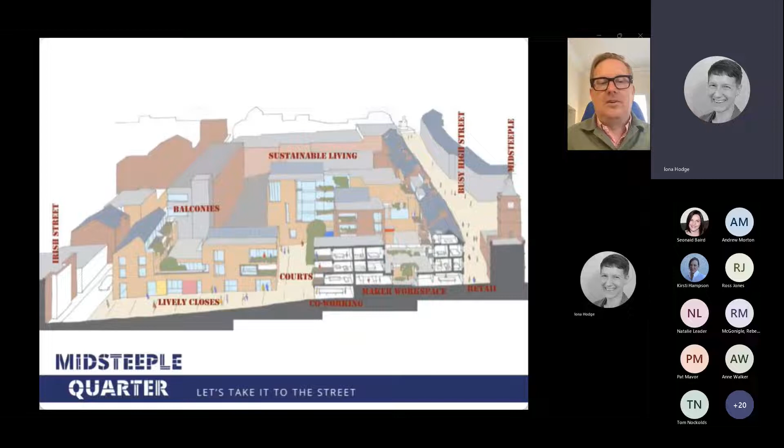To summarise it, the Midsteeple Quarter vision is to see the local community take control of a group of underused, neglected high street buildings, refurbish, redevelop these as a contemporary, living, working, socialising, learning and enterprising quarter, a new beating heart for a more diverse town centre and a catalyst for a thriving and resilient future Dumfries. In 2018, we held an architecture competition to provide ideas for the concept, which was won by ARPL Architects, with whom we now have an ongoing relationship, and they produced the design of phase 1 of our redevelopment. This master plan was submitted to the council and was approved in November 2019 as supplementary planning policy, underpinned by planning policy in the local development plan 2 for Dumfries and Galloway. In 2022, it won Master Plan of the Year at the Scottish Design Awards.

A total project cost of about 25 million is envisaged, and it's intended as a long-term project over the next 20 to 25 years. The master plan includes a phasing plan showing phase 1 currently under construction and fully funded. Phase 2, site assembly through purchase and meanwhile use of other high street frontages and backland. Phase 3, the development of those high street frontages and backland. And phases 4 and 5 are not necessarily considering acquisition, but working with the current owners of the properties. This phasing has been carefully factored into options and plans for how we provide low carbon heating for the site.

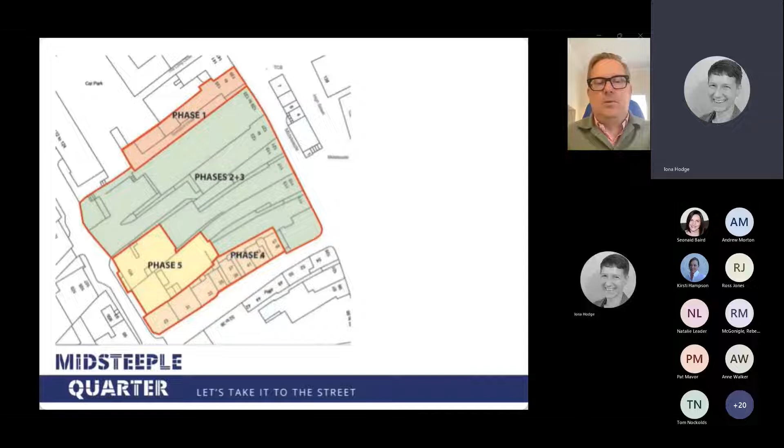Phase 1 of the project started construction in June this year with a programmed completion date in early 2024. We took ownership of this building through a community asset transfer in November 2018, and the redevelopment will provide a range of flexible business, cultural and community spaces on the ground and first floors and 7 affordable flats to rent on upper floors.

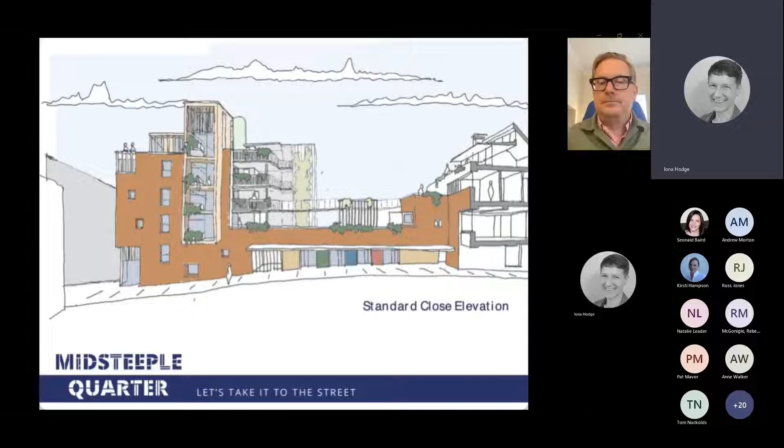The Midsteeple Quarter team, the Phase 1 design team and Local Energy Scotland sought to find ways of minimising the carbon footprint of the Phase 1 development during the design phase. And given that the proposed flats were to be for affordable rent and much of the commercial space would be rented to enterprise startups and community groups, we also wanted to keep bills down as much as possible.

This foresight has proven invaluable given the current energy crisis, as well as being motivated by net zero targets and climate crisis concerns. All of the usual renewable energy sources were considered during the design process, and solar PV will be put in the roofs.

Dumfries overlies the only significant Permian age basin in Scotland, the youngest and therefore least compacted sedimentary bedrock type in southern Scotland, and includes a warm water aquifer. Previous boreholes in the region and studies commissioned by the local authority indicated that this could have the potential for geothermal energy extraction. With funding from CARES, the development of a proposal has taken forward the aspiration to create a district heating system using geothermal technology related to this unique geological opportunity.

This has enabled us to engage the services of Locogen consultants to advise on the potential of this and manage the process of taking it forward. A feasibility study showed potential for substantial heat resource from the aquifer. Funding secured by CARES and the Energy Redress Fund is enabling us to take forward the drilling of 2 test boreholes in Dumfries High Street. This will shortly be going out to tender.

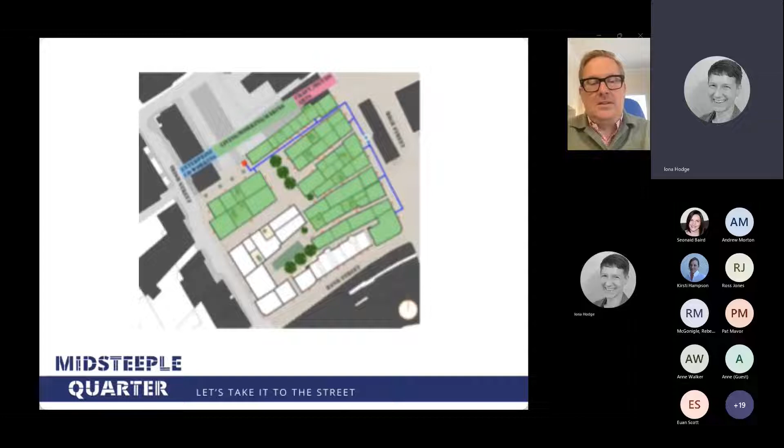Tests of yield from the boreholes will inform the design of the heating system for phase 1. If it confirms that such a system will work at this location, we plan to not only heat phase 1, but install the piping infrastructure in the High Street now, so that over time we can create a district heating system for the whole Midsteeple Quarter and potentially the wider town centre too. The benefits of this will enable us to supply affordable heating to our buildings and, depending on the yield, the wider town centre too.

Midsteeple Quarter has an ambitious vision for the High Street regeneration.

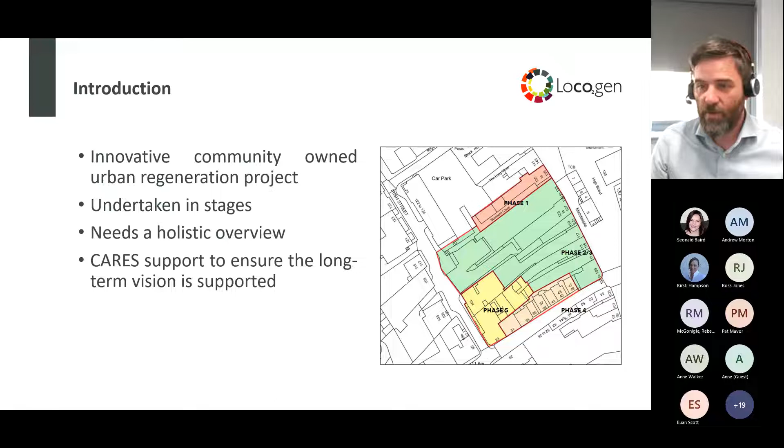And that's something that CARES were bought into and were able to then support Midsteeple Quarter in delivering. So our challenge was to try and understand how all that was going to fit together, which has been fun, complicated, but fun. So at the earliest stage, what we had was the architect's master plan drawing.

So we had to take that information and understand what that meant in terms of heating profiles, in terms of electricity profiles, in terms of what those demands were going to look like throughout the year and across the different building types, so that we could start to get a handle on what the renewable energy options were going to be. So we had to look at all generation types, but it became clear pretty quickly that PV and some form of heat pump were going to be the predominant options.

Given the inner city nature and the layout of the buildings, we're going to maximise the opportunity for PV on the roofs, but there's little more. It adds a proportion of the energy demands, but it is not as much as the full demand could be for the buildings. But it will supplement the building energy requirements.

The bulk of the work that we've been doing has been looking at the heat delivery portions of the project, with the intention that as these buildings get built, there'll be no gas, and we wanted to look at the zero carbon or low carbon heating options anyway. We knew that we were trying to compare predominantly the direct electric or air source heat pumps as the base case, as the business as usual.

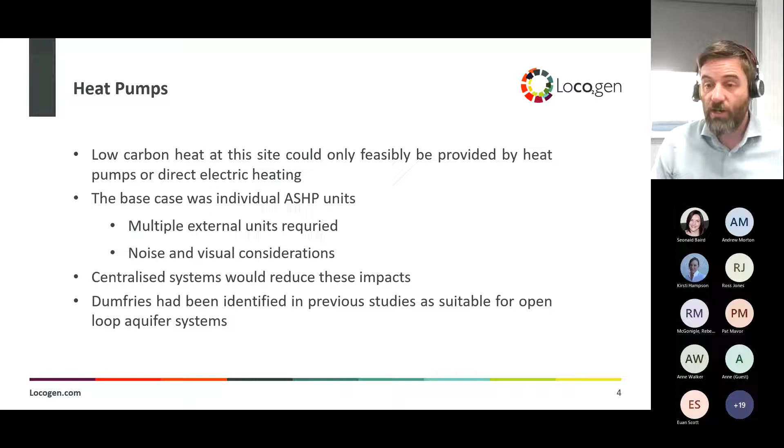So there are options for both centralized air source systems and for ground source systems. But as Scott mentioned, Dumfries has an interesting geology. It had been flagged in previous studies that there was the potential for what's called an open loop aquifer scheme, where we pull water out of the aquifer, put that through the heat pump to abstract the ambient low temperature heat, and re-inject water back into the same aquifer. So this is more efficient in some respects than the traditional ground source system, because you're getting that direct heat exchange with the groundwater itself. It has other issues, such as we have to have the right pumping equipment and the right filtration, but it provides quite a unique opportunity for us to explore in this situation.

So as you said, there are two topologies, two options that we looked at. One is where you can have an air source unit driving a low temperature network with individual heat pumps in each building. So the initial air source system would provide that base load heat, and then each individual flat would use its own heat pump to drive the temperature up to the demands that they require.

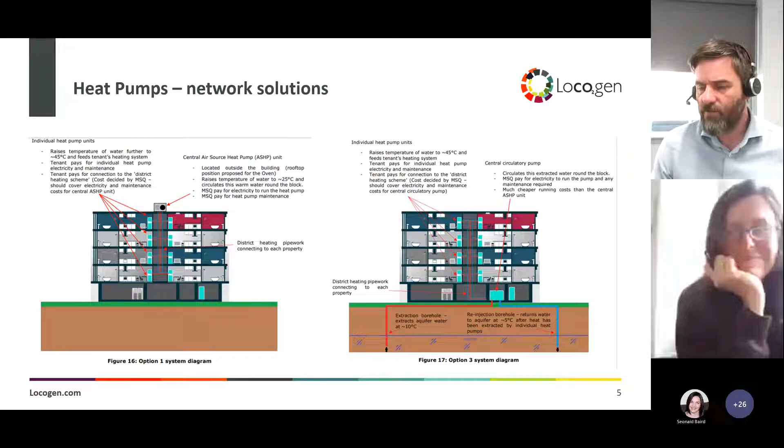This is a system that's been used in London and a few other places where they can't access groundwater or other low temperature heat sources, and that's been the alternative, the fallback technology for the site here. But what we really wanted to explore was the aquifer system, which is the one on the right, which is where we're pulling the water out.

Now, we don't know exactly what that temperature is going to be, but we anticipate it to be around 10 degrees, which is pretty good for ground source systems. And if, as is believed, the aquifer is mobile, then that will recharge.

So one of the issues that you see with ground source systems, where it's a closed loop network, where it's just pipes in boreholes with the water running through those boreholes, is that if it's not designed carefully, you can slowly extract more heat, and the temperature of those ground loops can cool slowly over time. Whereas with a mobile aquifer, water is passing through and refreshing the energy that's being pulled out. So you can maintain that same input-output temperature differential through the operation of the system.

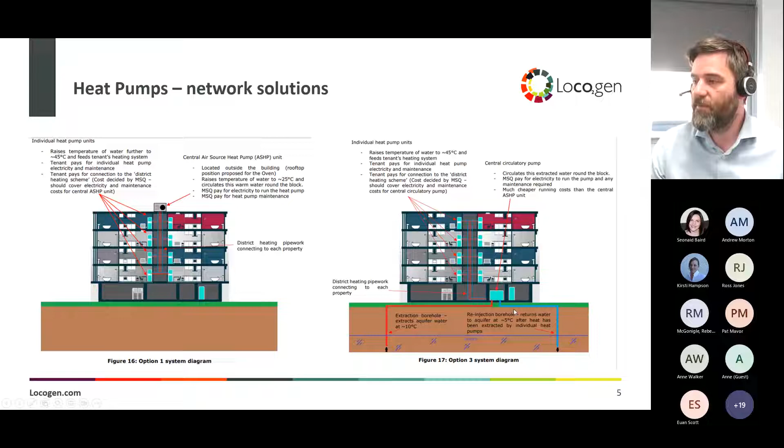So it's quite an exciting, quite an innovative and interesting scheme that's being looked at here. But it's complex. With closed loop systems, it's much easier to understand. We just need to know what the geology is going to be, and you can work out what the heat transfer coefficients are likely to be and the number of boreholes. For something like an open loop system, you really need some people that understand it. There are only a few organizations that have the kind of technical skill and have been involved in these types of projects that we can bring in to advise us on the technical details of that subsurface geology.

So we brought in a specialist consultant, Carbon Zero in this case, who did the hydrogeotechnical studies and designed how those borehole systems would work so that we could abstract the heat that we need. Because again, we're not looking at providing a system that's just going to feed the stage 1 building, but enough water pulled out of the aquifer that we can provide for all of the phases of the Midsteeple Quarter development. So it's a bigger, more complex system because we're making that forward planning.

So we're looking at drilling 2 holes. They're lined, cased holes. They're much larger than you would see for normal ground source closed loop systems. And they're fitted with a filter pack to stop the silt and the sand from being pulled through. And we abstract from one, suck it up, and then re-inject it back into the other. But as with everything to do with geology, all the desktop investigations in the world and the analysis of other boreholes in the area, all that got studied, but you only truly know what happens in your area when you drill the hole.

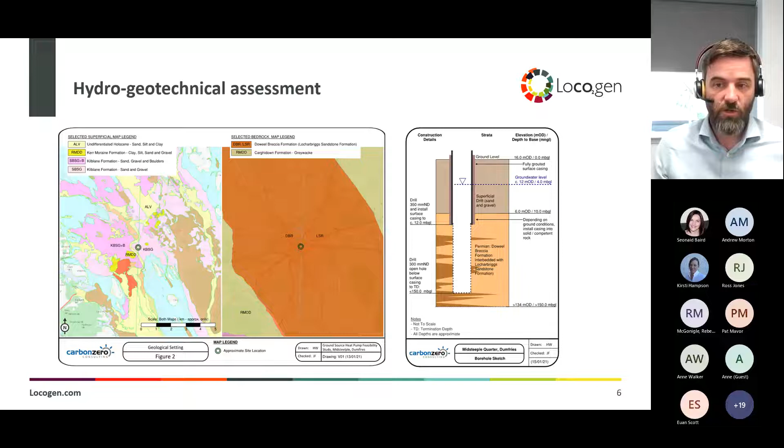So we worked with CARES and Energy Redress to get the funding so that we could drill those 2 holes. And those 2 boreholes that we're going to drill as test boreholes, they will become, fingers crossed, the live boreholes themselves. So it's not that you drill a test and then abandon it and do something later. The hole you drill is the hole that you test, and then the hole that you will use going forward for that network.

So we wanted to understand the scheme, not just in the isolation of the Midsteeple Quarter development, but in terms of any other future developments, because with LHEES and other Scottish Government considerations around renewable heat, we want to make sure that this is part of the future development strategy. So we were speaking to the local authority. We've been speaking to other developers in the area to understand what their loads are going to be. And they were all very excited and all very interested.

And I think it's fair to say that they really want to know how we get on, because they're really keen to do something similar, and they hope that our project turns out well. So it's very clear that if this works, then we expect there to be replication of it going forward in the area. But they were all very keen that we champion the way and lead the cause to identify and answer the questions that everybody wanted answers to.

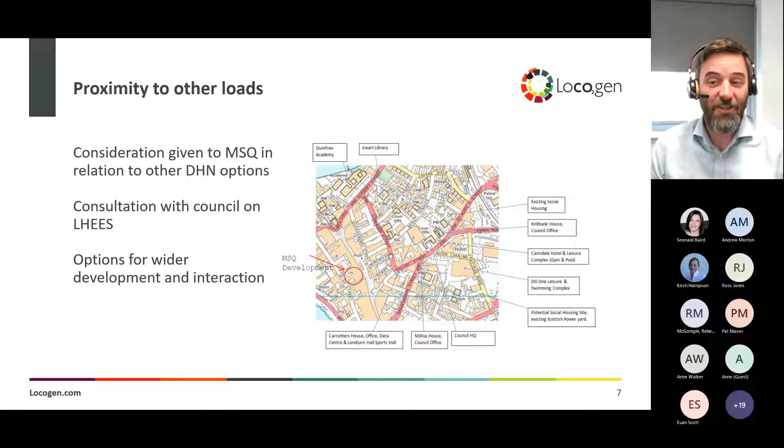So we spent quite a bit of time looking at different borehole options. On the left is the first design that we came up with, which was actually to have one at the front of the high street and one at the back behind the first building. So the first building there is the oven. That had the advantage that we were only drilling one borehole on local authority streets, but actually we had to change the location during the development because of the phasing of some of the works and also the proximity of that borehole to the building.

So we're actually going for 2 boreholes in the high street, an abstraction and discharge borehole, which will allow us to run the tests. So we had to get planning permission in place. We had to deal with the local authority to ensure that this was all signed up. So we've got all that. We also had to speak to SEPA, because SEPA are the guardians of that water resource, and they're the people that you need to get the permissions off to ensure that we are dealing with that resource effectively, that we're not taking more out or changing the temperature too much.

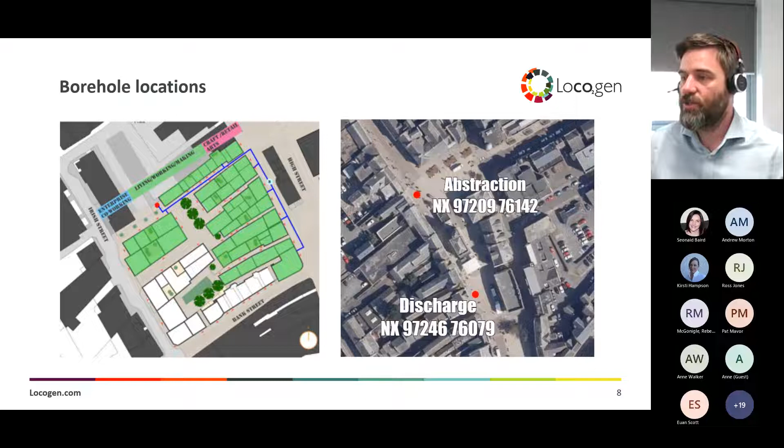So as Scott mentioned, one of the issues we came across, because we knew a number of these things would be complicated. One of the things that we hadn't banked on, or at least hadn't thought would be as complicated, was actually the short-term discharge of water for test drilling. So in order to test the borehole to ensure that you can get the water resource that you need, you have to flush it, and then you have to run a pump test on it to show that you can pull the right water out.

So we're looking at 14, 15 litres a second, so high volumes for the full development. So we need to be able to pump that water out for 24 hours to ensure that the aquifer can recover if you're taking that water out permanently. So actually that's a lot of water. It's about 50 cube an hour. That's 2 large water tankers an hour of water that we would be moving in the full flow test.

And it turns out that Scottish Water weren't able to offer initially the ability for us to put that into the sewer, even for that short-term test. So we've had to do a lot of work with them to understand and resolve how we can fit around their requirements and what that means, because what we don't want to do is to overflow the sewers, even if it's just for that one day of testing. So it was actually a lot more time and effort and resource had to go into putting that testing in place and to resolve those issues with Scottish Water.

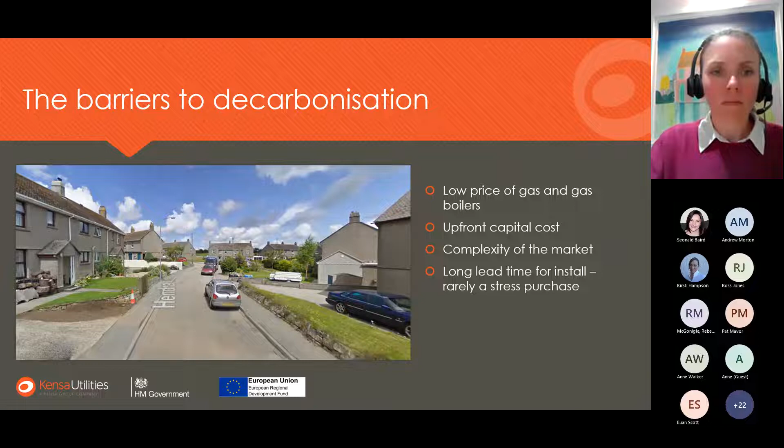So the Kensa vision for the future is split ownership, ground source heating installed street by street. So rather than individuals going out and getting their own air source heat pump or their own ground source heat pump and their own ground array, we would have town-wide ground arrays that people would be able to connect to when their boiler breaks.

It is a form of district heating, but it's an ambient temperature system. So again, it's round about 10 degrees Celsius, certainly in Cornwall. And that can drop over time, but if the ground array is sized correctly, we should be able to maintain that, especially if we introduce cooling to that array, because the ground array can provide cooling as well as heating. Each house would have an individual heat pump in the same way as David was describing for their system.

And the basic setup would mimic the gas network. So you would be able to connect when your system breaks. You wouldn't have to pay for that high upfront cost of installing the infrastructure, which doesn't require any real maintenance. It's very stable. There are no moving parts, and the infrastructure will be there for 100 years after it's installed. It's just plastic pipe, the same pipework as the water utility providers install.

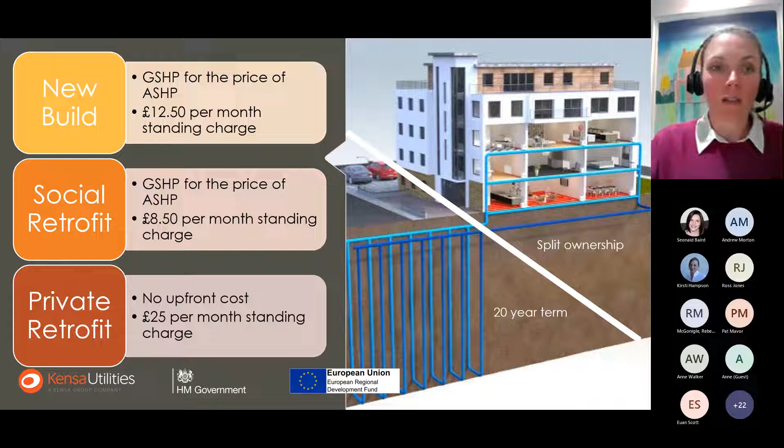So if the social housing property is sold to the tenant, that payment will be passed on to them and the agreement will pass to them. If the private retrofit house comes to sell, they'll have to pass on the contract to the next tenant of the house. But why would each of these want it? You know, what makes them want to take up the offer? And it's not just the grant funding that we've got.

For new build developers, the offer actually provides them with slightly lower upfront cost than an air source heat pump, which makes it much easier for them to deliver the project with low carbon heating. And then they can pass on that long-term repayment to the property owner. And because it's really quite affordable, it doesn't reduce the saleability of the house.

For social housing landlords, their particular interest is less in the capital cost reduction and more in the simplification of their business model. So should the homeowner exercise their right to buy, the social housing landlord is not left with the infrastructure that's serving their house. They're not left with the responsibility of that. So they can pass that on to the homeowner and they won't be left with a stranded asset.

For the private homeowner, the barrier of that upfront cost is reduced, so renewable heating gets more accessible. It's also more simple because they don't have to do the project management for the whole installation. They don't have to search around the market. And in future, if we're successful with rolling this out across much more of the UK, there would be no requirement on them to install one of the Kensa ground source heat pumps. You could connect any ground source heat pump to this system and it would still work.

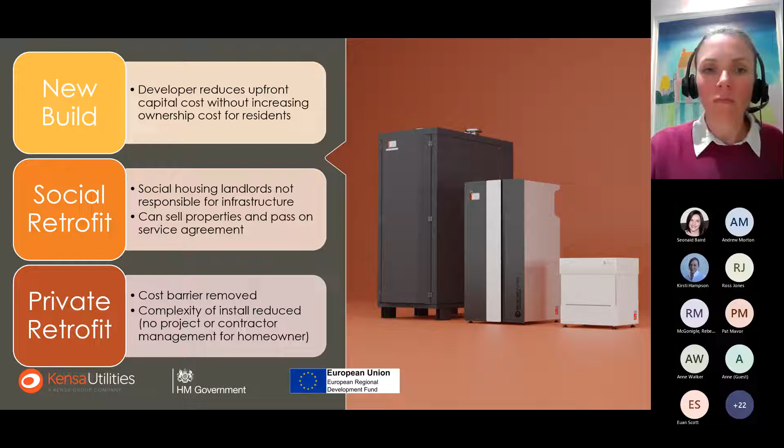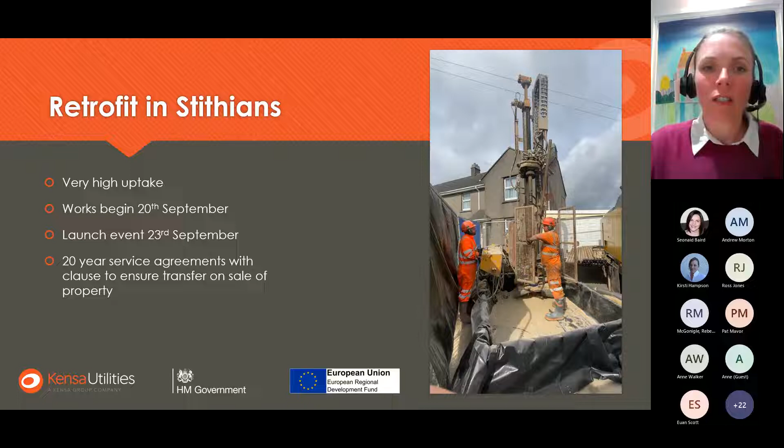We've had fantastically high uptake for this across the village. People are really keen to take part in this project, and for various different reasons. So in Stithians, it's an off-gas village, and that means that people there are facing having to find renewable heating from 2026 as the government's trying to phase out replacement of fossil fuel boilers.

The next part of our project in Stithians is a shared ground array installed in the road, serving around 60 properties, which are a mix of social housing and private retrofit. It's actually a really complex thing to do. It's not business as usual for Kensa, and it's certainly not business as usual to install a ground array in the road in anything but new build. And in the new build development, you'd put that ground array in and the road would be built on top. There's no issue. It's far harder on private retrofit.

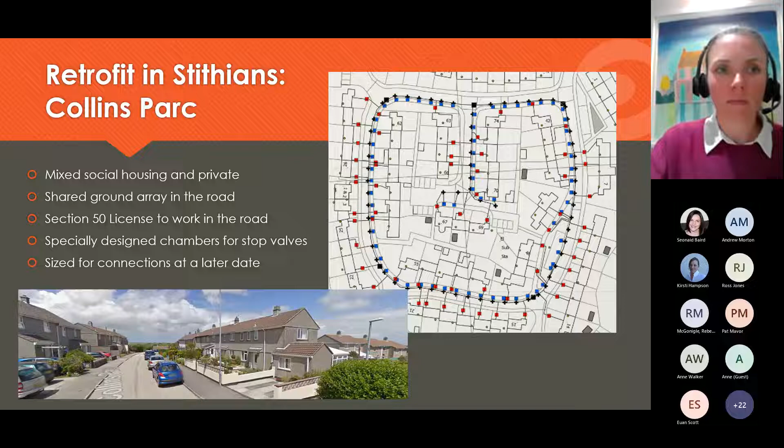Now, in a similar way, we've done a huge amount of consultation and we've had a lot of feedback. And the reasons that people are appreciative of what we're doing vary massively across the board. Some people are really keen on the environmental benefits of the project. Others just want to be able to budget better. So one of the people that we spoke to currently has an oil system that they're not able to afford the upfront cost of the fuel, so they can't get the tank filled.

And last year that meant that they went out and had to buy electric heaters for their home, which are far more expensive to run. But it was the only way that they were able to heat their home that year. And that's not the kind of person that would be able to buy a heat pump themselves and have that installed themselves, because the upfront cost is just so high. So it's a fantastic benefit that this is delivering to the village.

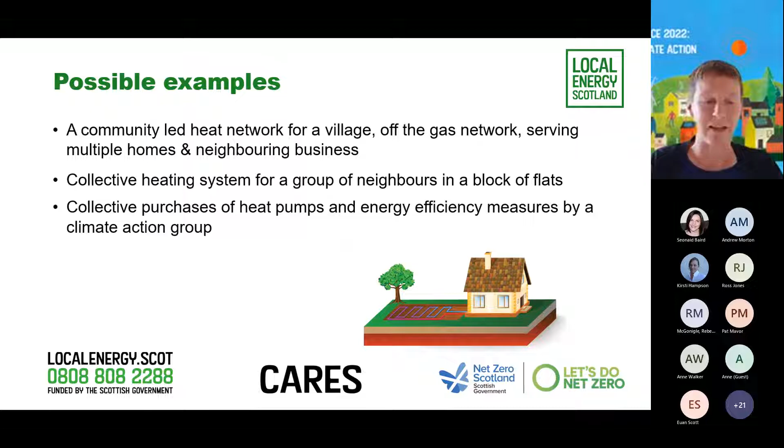So as I mentioned, this is a new programme for CARES, and it's a programme very much where we want to learn. And our aim is to find and support replicable models for community heat decarbonisation projects. We'll be learning as we go along from the findings of the studies, from the experiences of the communities and the expertise of the companies that we work with. The findings will map out next steps for the community projects, and we'll use this learning to create supportive tools and resources. And we'd very much welcome your thoughts and ideas in the question and answer session we'll just go into.

While we're mobilising and launching later this year, there's other steps that communities can be taking. Home Energy Scotland is a fantastic resource to provide householders with advice to reduce energy bills and improve energy efficiency measures. You can be collating information to understand how much you're using and how much it's costing. And you can be talking to neighbours to gauge interest and see what could be done as a collaborative approach.